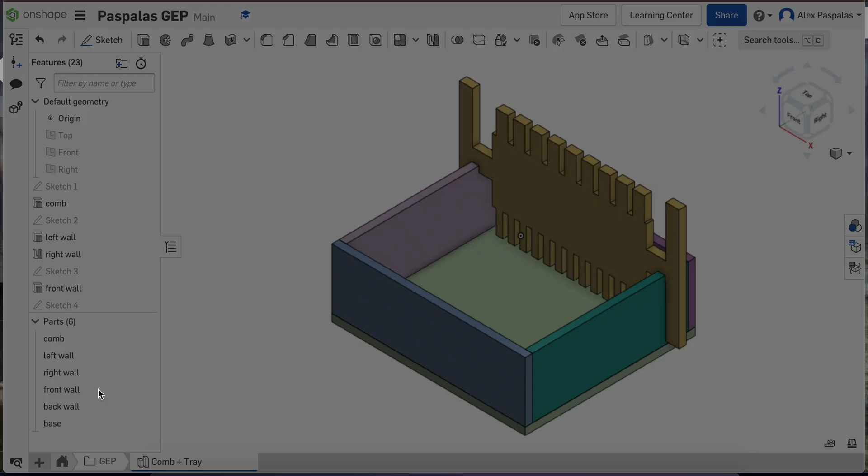Now, when you go to create a drawing, you have some options for templates to choose. You want to choose the template that's called ANSI-A. Okay, sets the sheet size, so make sure it's sheet size A, and then inch. We designed our project in inches, so we're going to want to keep it in inches for the drawing as well. You want to make sure that no views are selected because we're going to manually insert those views into the drawing tab, and then you're going to click OK.

Now, before you just start clicking and trying to insert different views of your different parts, I always like to set up my sheet. So you're just going to X out of all those things that pop up once you get onto the drawing tab. I always like to rename things as well, just to keep things organized. So you can go ahead and rename your drawing tab part templates. Because like I said, we're going to be printing out these drawings and using them as our templates when we are prototyping our GEP project out of cardboard.

So before we insert any views, we just want to set up our sheet. We are using a 1-to-1 scale when we're creating these drawings, just so when we print out these drawings and we cut out the templates, we are cutting out those templates and creating those cardboard pieces at actual size, so the actual size that you model them in Onshape.

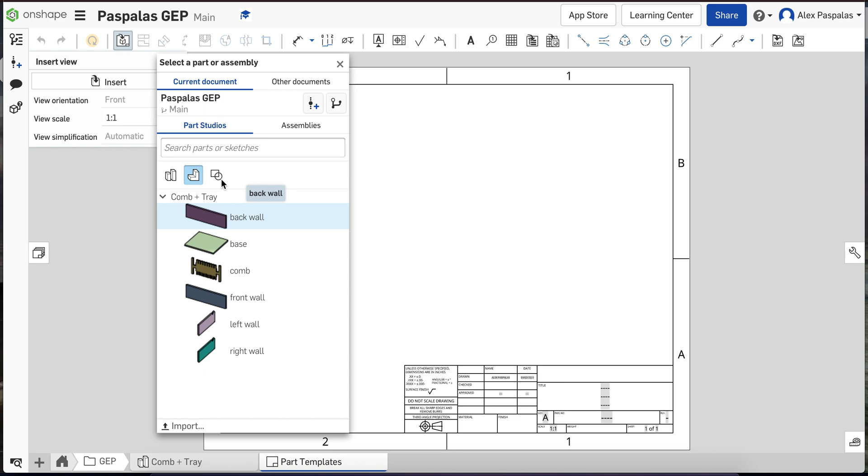So I will start with the back wall. So I'm going to choose back wall. And most of the view orientation of the parts that we're going to bring in is the front view. So I'm going to choose that. And that is actually all we need for that part. So that's the back wall.

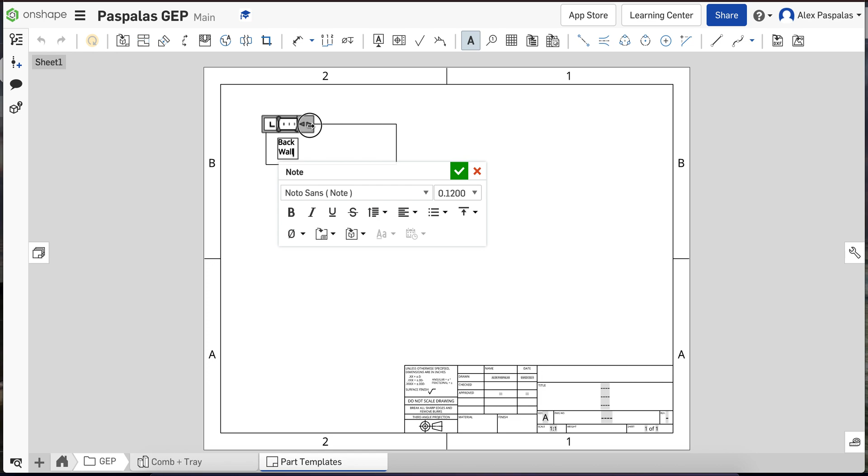What might help you guys just to stay organized is to kind of label all the parts. So we can create notes or actually add text into this drawing tab. So in the very middle of your top toolbar, you'll see this A. This is the note tool. Click the note tool and then click somewhere in the middle of your part. And I'm going to label this back wall. And we can increase this a little bit so that it looks a little better. And I'm going to hit the green check. It doesn't have to be perfect.

It doesn't have to be perfectly in the middle, but this is going to help you organize your parts once you do print this drawing out, like I said, and cut out all these templates so you kind of know what's what. So I'm going to repeat the process here, but I'm going to press insert again, and now I will choose the base.

Now you'll notice that if I keep the view orientation on the front for the base, the front of the base is not necessarily looking at the base to see its full view, right? Sometimes when you choose the view orientation as front, even though technically this is the front view of how you created it in your part studio, this is not necessarily the view we want. So you might have to play around with this a little bit.

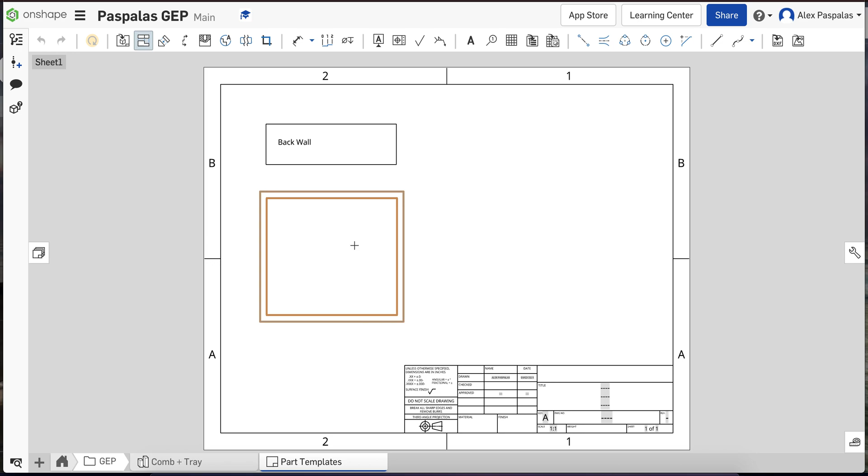I'm going to try choosing top and see if I can get the majority of the base. So yes, I get the majority of the base. I'm going to drop it down on my workspace and hit escape. You want to leave some room between your templates just so when you cut them out, you're not cutting in between things. I'm going to add a note and call this base. And I don't need another note there, so I'm good.

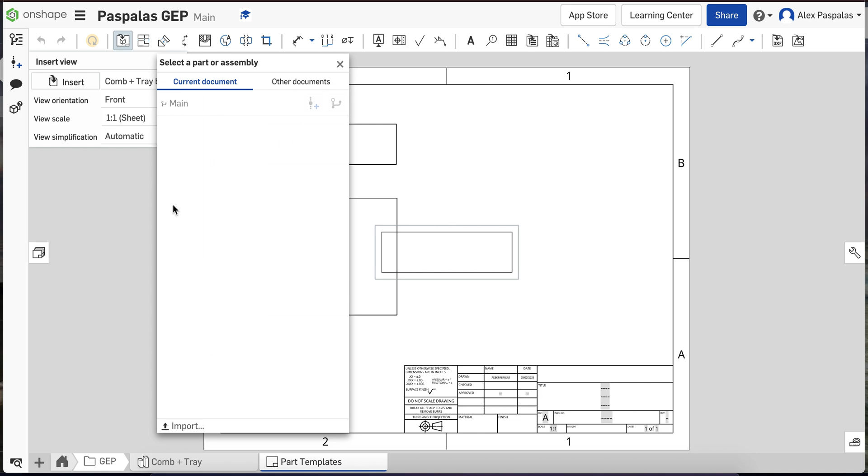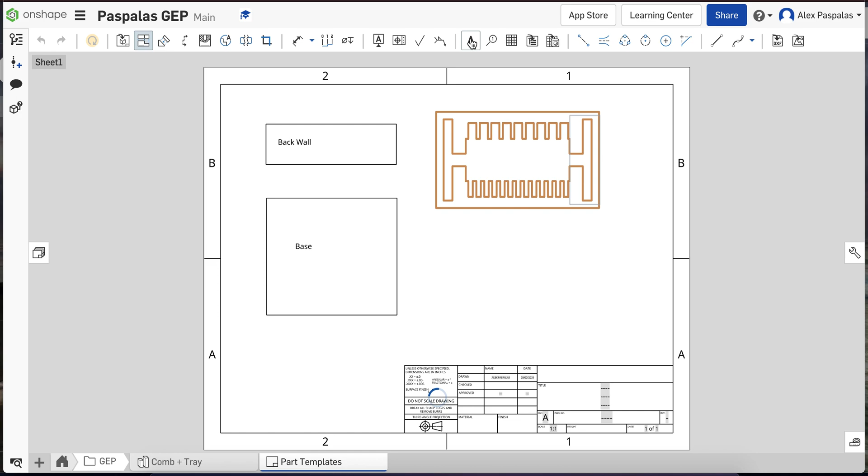And you're just going to continue down with all your parts. Like I said, you're going to have more parts than I am. If I choose front of the comb, this will probably work as well. Sometimes the drawing tabs take a couple seconds to load, so you're just going to have to wait. It's definitely laggy. So I dropped down the front view of my comb. I'm going to add a note again and label this comb.

And then let's see, I probably can fit one more on here. I'll do the front wall. So we'll see if the front wall shows up how we like it. Yes, that looks good. So again, you might have to play around with the view orientation of certain parts. And again, if you're doing this in class, just ask either myself, Miss Smitlitsky, or Miss Hodgson, and we will be happy to help you. I'm going to label this front wall just so we know. And that's probably all I'm going to be able to fit on this sheet, which is fine.

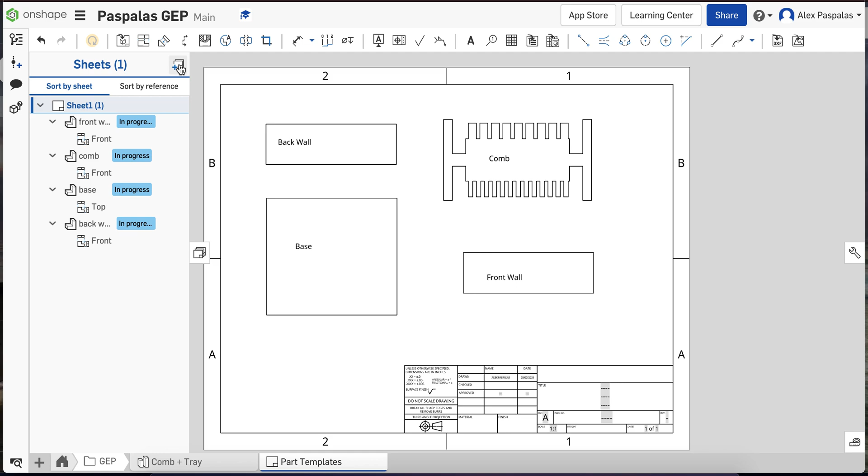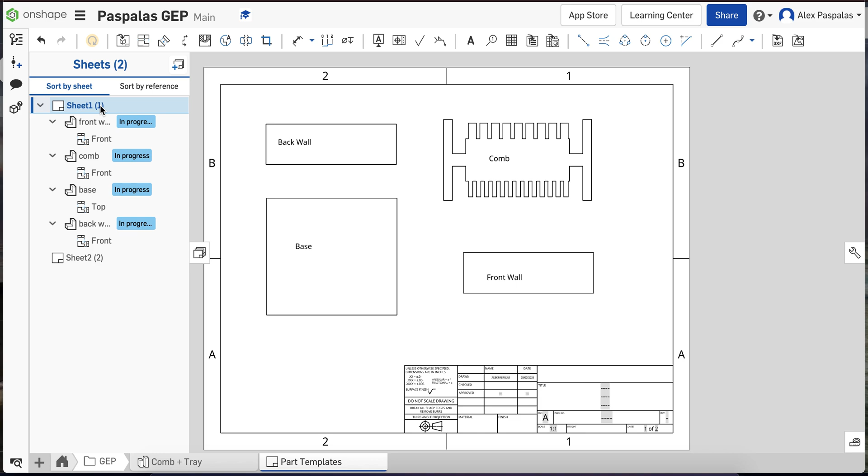The nice thing in Onshape is we can add multiple sheets to a drawing and kind of create a packet of all our templates. So to add a new sheet to your drawing tab, you're going to come over here to the very left middle of your workspace and press the sheets icon. And you're going to come up here and press this insert sheet button. And then you'll see sheet 2 pops up. And now that's completely blank, and we could add more templates to this sheet. If you want to go back to sheet 1 for some reason, if you need to change something, double click on sheet 1, and you can toggle back and forth between the two.

Okay? Again, insert, same format. Then I'm going to do my left wall. Obviously, that's not the view. I can just tell from now, even though it's loading here, that's not the view I want for my left wall. So I'm going to choose left, drop it down. You see my notch there. It's still 1-to-1 scale because we set that in the first sheet. That was the first thing we did. Add a note, label it, and you guys get the gist.

Okay. Once you're done, you might have multiple sheets. Some of you guys may have 3 sheets, 4 sheets, even 5 sheets, depending on how many parts you created and how complex your project is. But once you're done putting all of your parts down, so we have our templates ready to go and everything's labeled, to be able to export and print this out, you're going to come down to your part templates tab. You're going to 2-finger click and press export. Leave the file name as Part Templates, leave the format as PDF, and leave everything else as is. And then you're going to press export.

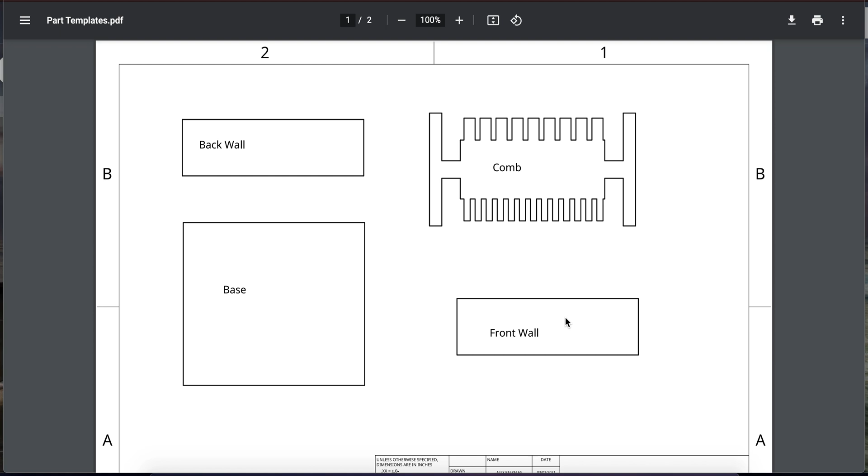It may take a second, like I said. Onshape sometimes lags. And then you'll see down at the bottom here, I have my part templates PDF. You can go to your downloads and open that, or I can just double click it from here. And that'll open. You see our templates labeled. You guys could press print, whether you're at home or you're at school. You can print these out, and then you have your templates to be able to cut out your cardboard parts of the project.